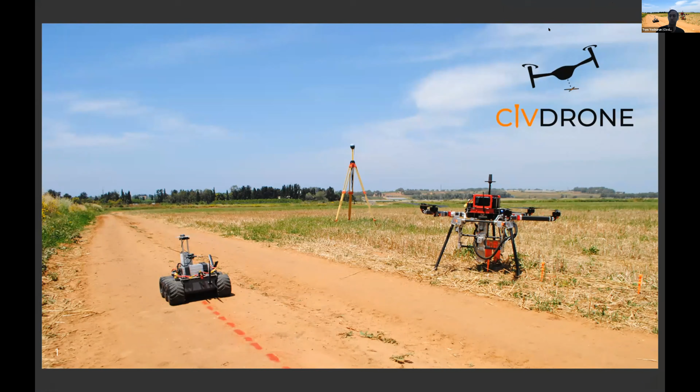My name is Tom Yeshurun, and I'm the CEO and co-founder of Civdrone. We are enabling unmanned systems to do precise marking in construction sites. The thing started out in Israel. Myself and Liav, my co-founder, are both civil engineers. We worked in construction management positions in road, rail, ports, and waterways projects, and truly understand the market needs and

what it entails. On my right, we have Lior, our VP R&D, with expertise in robotics and obstacle avoidance systems. And on the left, Guy, with emphasis on system engineering, control, and management, with a big passion for drones, been building drones and flying them for over a decade now. I'm here in sunny California. It's great to be out here. We have developed the first autonomous staking solution in the market, and we already have 10 employees in total.

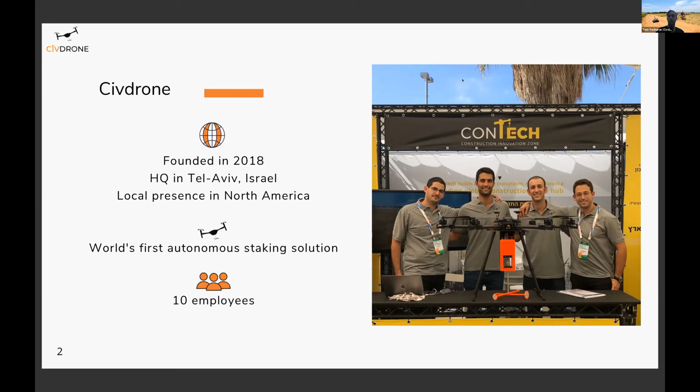We built this because construction is being built according to blueprints. It has to be built that way. That's how we have it designed. But during construction, we have to do it precisely. Every inch matters. That's why we have surveying professionals on our job sites from day one until the last day of construction. The main role during construction is called marking or stakeout. Stakeout is there to guide us where to build the sidewalk alongside the road, the stop sign in the intersection, and many other elements during the construction phase.

Today, this is done manually by people walking around, hammering stakes into the ground day after day, attaching ribbons to them, writing numbers on them that reflect instructions of what to do there. For instance, here you install the foundations for your house. This is pile type A, pile type B. Install a pipe at this depth, this diameter, with this offset. This is very repetitive every day, and people make mistakes. We are all human after all. So we're trying to avoid these problems by empowering contractors to do this more effectively using robotics. Sometimes we also just have colored flags. A color palette is also a great way to convey information without scribblings on stakes.

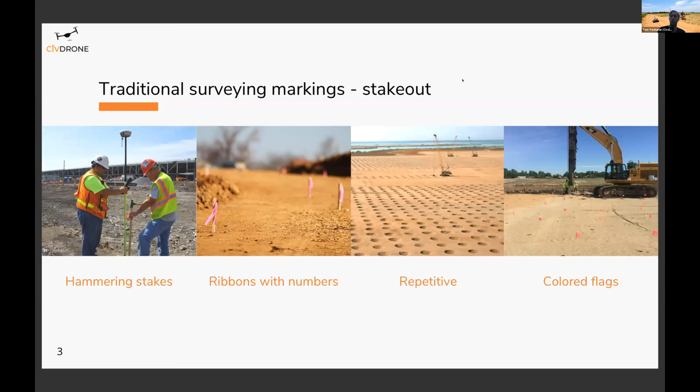The other kind of marking is called layout, mostly seen on the side of the road, on parking lots, marking utilities. These layouts are done, again, according to the blueprints to convey where to paint the actual parking lots or lines or elements, or to warn contractors: here there is a pipe underground, about 2-3 feet under the street, so don't dig here. It's called 811 as well. These kinds of markings are done with layout outdoors with spray paint.

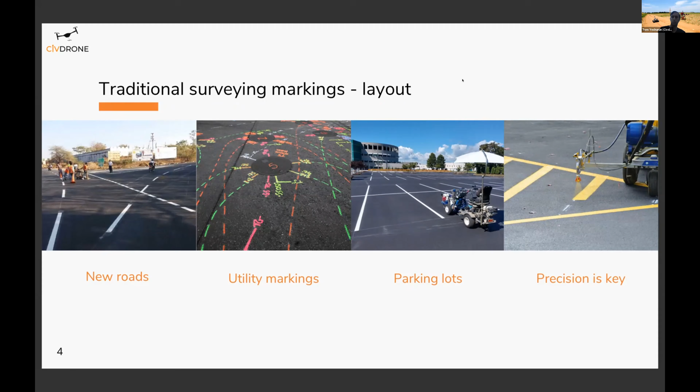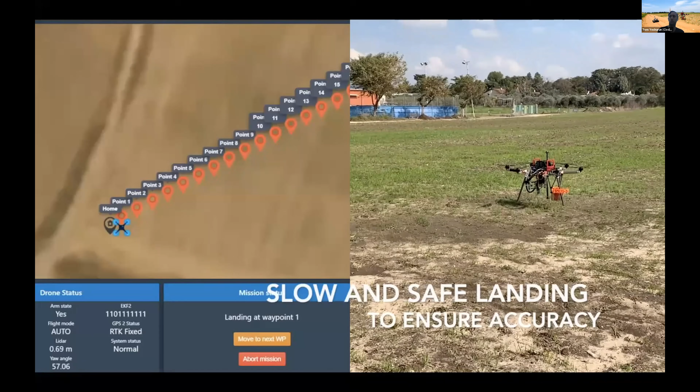So without further ado, I'm going to show you a quick video of how we automate this process. Instead of guiding people where to walk and where to hammer the stakes in the ground, we send out the drone to do this mission. We set its settings, in this case, 4 meters, about 12 feet from the ground. It flies. It lands usually within about 2 inches; that's usually the landing accuracy we achieve. After landing, we wait a few seconds. We know precisely where we are. We know where north is.

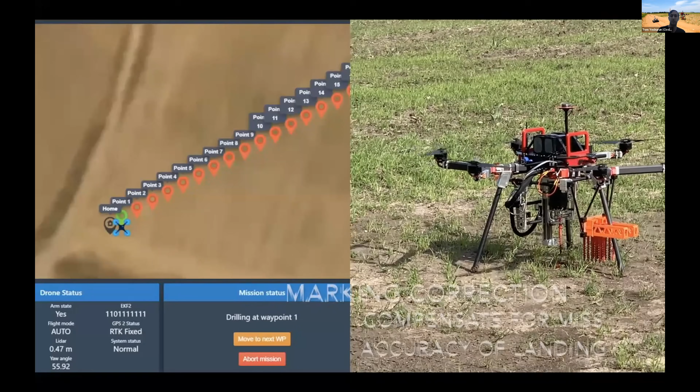With our 3-axis system, we can compensate for the missed landing accuracy and load a stake from the magazine. In a few seconds, you'll see us drilling the stake into the ground, achieving sub-inch accuracy. To visualize how accurate we are, we had a surveyor spray paint the coordinates. The drone is not aware of the spray paint, and we are using GNSS receivers on the drone itself, just as surveyors use today on their handheld devices, to achieve sub-inch accuracy.

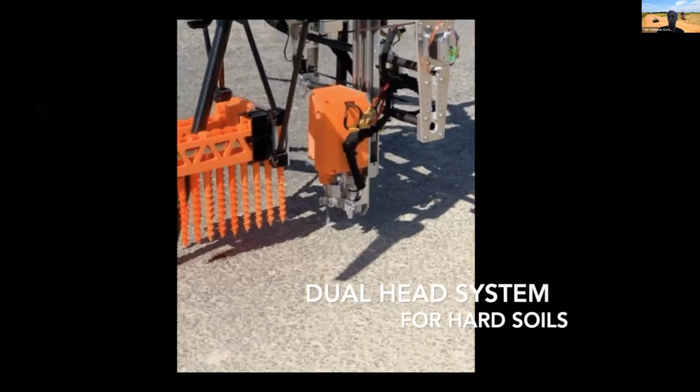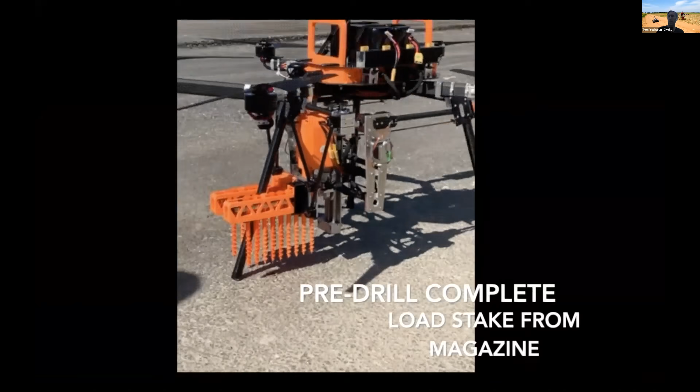And don't fool yourself. We're also doing this in hard soils, because that's usually the first question people ask me. We're even penetrating asphalt by making a pre-drill hole using a metal drill, then loading the plastic stake you saw earlier and putting it into the pre-drill hole that we made.

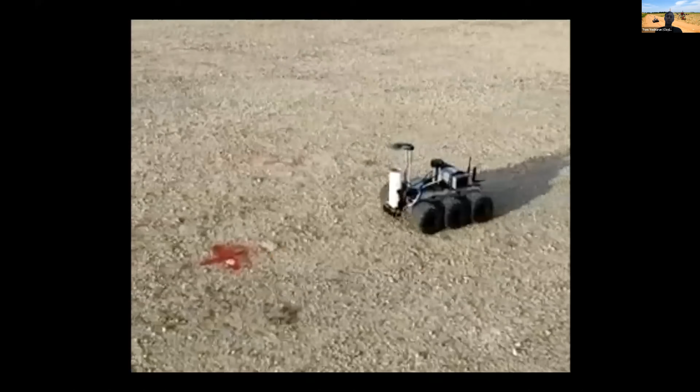Awesome. The next system you'll see is CivDot, our new system, which is still under testing with clients. It's for laying out spray paint outdoors. Here you can see it laying out 30 meters, about 30 yards, using spray paint. Just a straight line for a parking lot. Driving from point A to point B while staying within the allowed tolerance. In a few seconds, you'll see it towards the end. It's not using computer vision at all, just GNSS RTK, just like surveyors do today. And it is done. Great.

Last but not least, another great use case for CivDot is solar farms. In solar farm construction, the piles are really close to one another, so flying 10 or 15 feet is not a good use case for a drone. The rover does the spray paint, and a person just walks behind it and puts flags in different colors. By doing so, we're able to achieve up to 4,000 points a day, while usually it's not more than 500 a day when done manually.

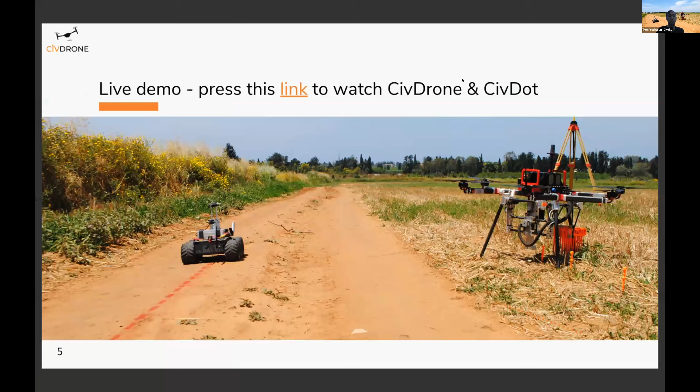So we saw how it works, and now we're talking about where we do this. We're doing it in renewable energy, like I mentioned, in solar farms and wind farm projects. In solar, they have a lot of piles, and in wind farms, they have a lot of access roads, which is another similar thing to road itself. And a pipeline. This is a long linear job site that requires a lot of marking during construction phase. Roads and rail, ports and waterways.

On one of the job sites we have visited, there are 20 surveying crews. That's 40 people working day and night on a port construction project in order to show and convey the information for the contractors, like we said earlier.

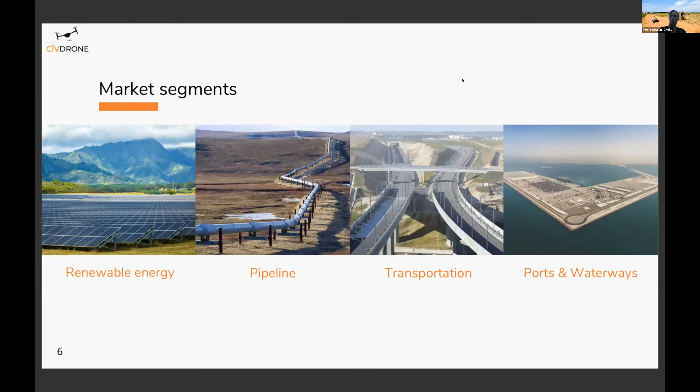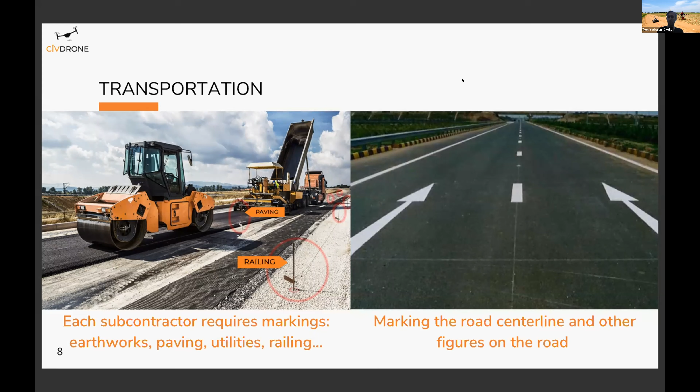On the road, we can see both kinds of markings, staking and layouts. On the left side, staking for railing, where to install the rail alongside the road, and where to pave and how much to pave, as you can see being done by the subcontractor for the paving. But after the pavement is over, we have to go and lay out so we can paint accordingly. Where to put the arrows, where to do the crossings, and whatnot. And that's done with paint, as you can see in the center line and the crossings.

We already deployed CivDrone around the globe. In Japan, we did a solar farm. And with Kajima, in Israel, with Shikun & Binui, we've done a road and also a foundation for a building. We laid out 100 piles in 2 hours. It was pretty great. And we also deployed this in Texas in another solar farm project. And we're actually going next week for 7 more product POCs, demos with clients as well that have been following us in the last couple of months.

So why do people choose to use CivDrone and CivDot? It's very simple. It's at least 4 times faster, Civ Dot even 10 times faster, because one drone can do 500 stakes a day compared to 120 points with the surveying crew of 2 professionals. That means one Civdrone can do the work of up to 8 surveying professionals, especially during COVID time when surveying crews work in pairs. Civdrone can do it on its own with 1 man, 1 drone. Or Civ Dot, again, 4,000 points a day. That's amazing. Most use cases we saw with layout, getting to 400, 500 at most.

And it's as reliable because we use the same GNSS survey grade equipment that surveyors use today, but instead of guiding people, it guides the drone where to do the marking. And it's so simple. You just press start using the same file type that everyone is accustomed to. And by doing it with less manpower on job sites and more efficiently, with less mistakes, it's anywhere between 30 to 70% cheaper, depending on how you do it today, in-house or outsource, or if you were using Civdrone to lay out 200 points versus 500 points, or Civ Dot, 500 points instead of 2,000 points we can do with Civ Dots.